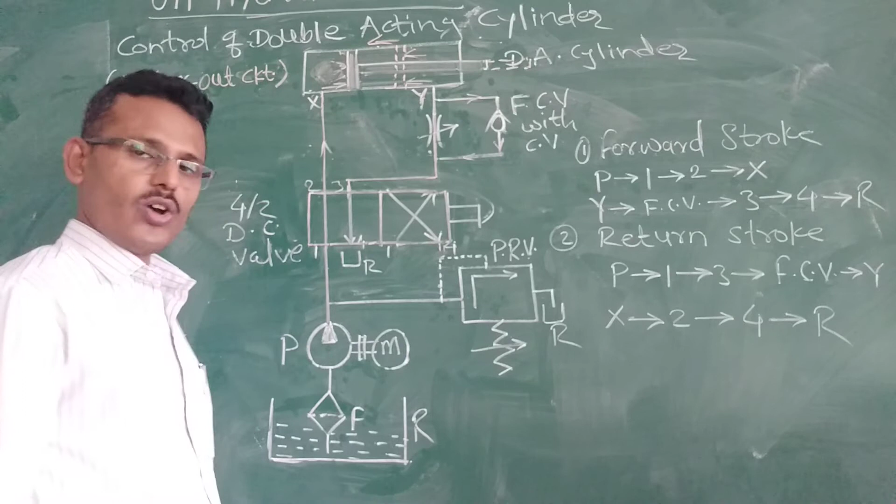So that pressurized oil gets supplied through the pump. It passes from port number 1, that is the inlet port of this direction controller, then it flows from port 1 to 2, then it gets admitted inside the actuator through its inlet port X. When this pressurized oil is admitted inside the cylinder, it will exert pressure on the piston. So this piston moves in the forward direction.

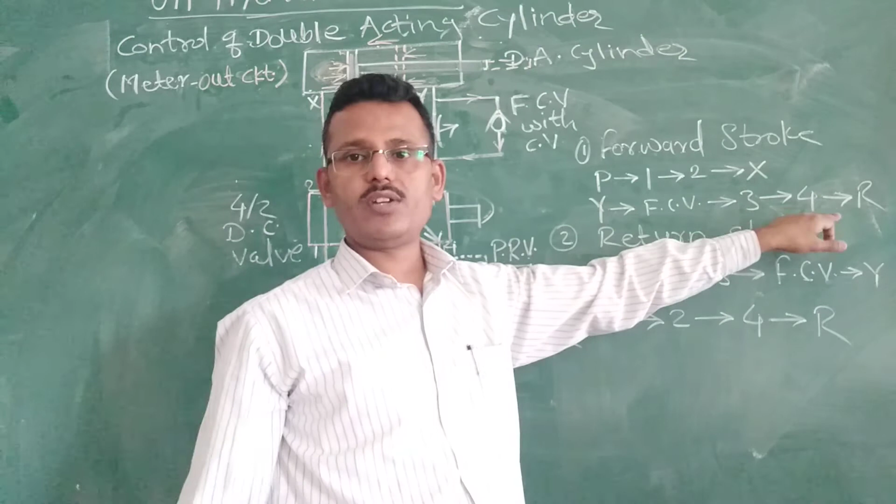So the oil flows from the pump to port number 1, then port number 2, then port X. Then again it flows from port Y, that is the outlet port of this actuator. Then it flows through the flow controller, then port 3, port 4, and finally it goes to the reservoir. In this way it completes its forward stroke.

If we keep the minimum opening of the flow controller, then whatever oil is coming from this side through this flow controller, there is a restriction to that oil. So the forward stroke or forward movement of this actuator will be slower. And if the maximum opening of this flow controller is kept, then a large quantity of oil flows through this flow controller, so that we can obtain faster movement of this actuator in the forward direction.

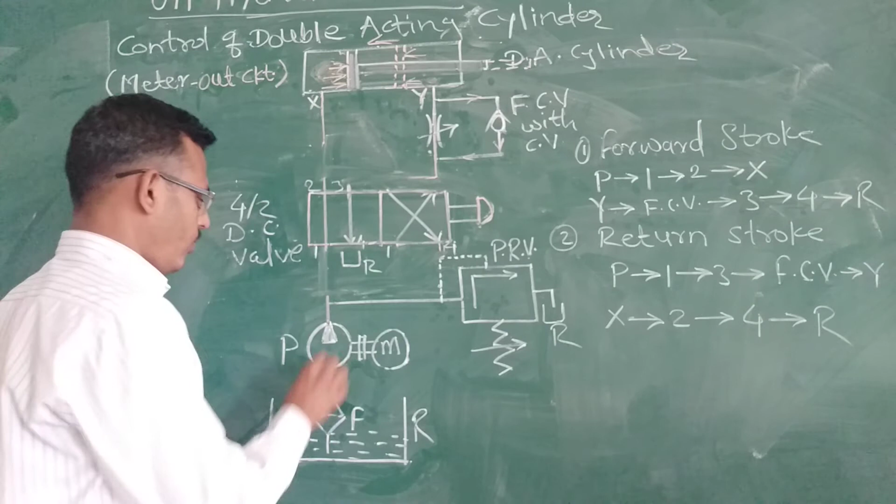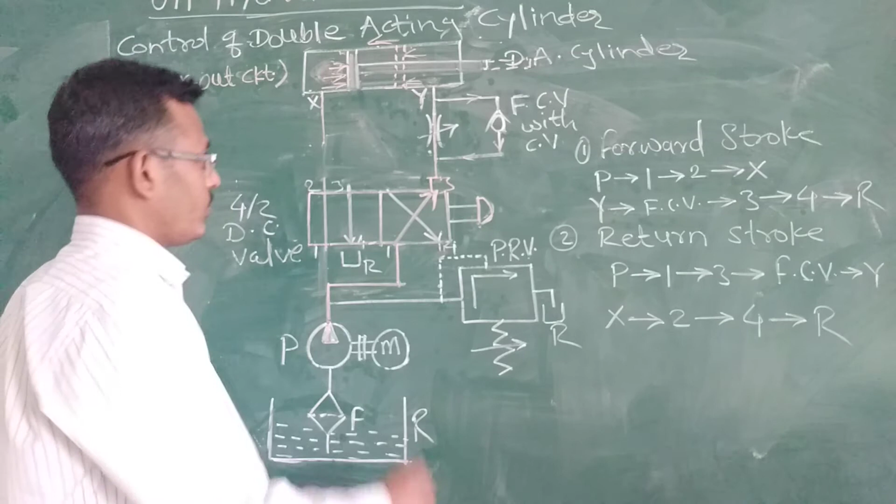Now when I operate or push this push button of this DC, we will get the second position. In the second position, the direction of the flowing fluid gets changed. So the oil flows from this pump to port number 1, then from port 1 to port number 3. From port 3 it flows through the flow controller. It does not flow through this check valve or non-return valve. Then it is admitted inside the actuator through port Y. Then it will exert pressure on the piston, so that this piston along with the piston rod moves in the backward direction.

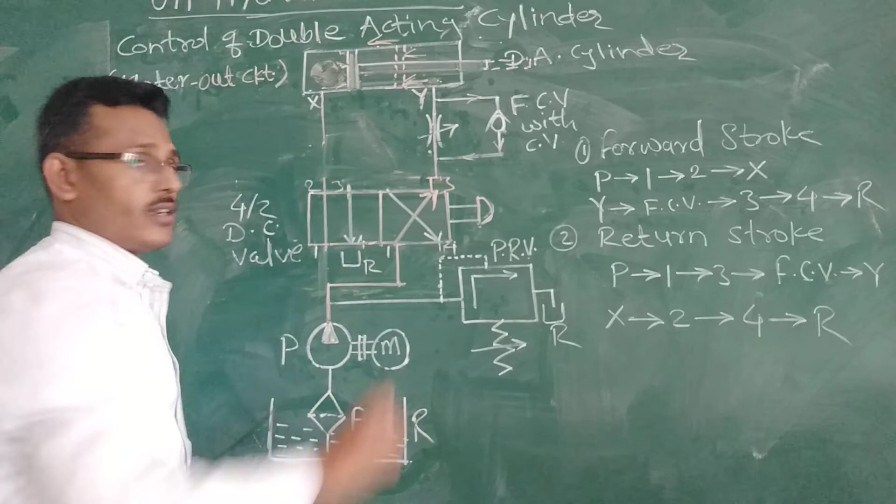If I keep the maximum opening of the flow controller, then a large quantity of oil will start to flow through this flow controller, and it exerts maximum pressure on this piston, so that this piston moves at a faster rate in the backward direction. And if I keep a minimum opening of this flow controller, then a minimum quantity of oil flows through it, and it exerts less pressure on the piston, so that this piston moves in the backward direction with lower speed.

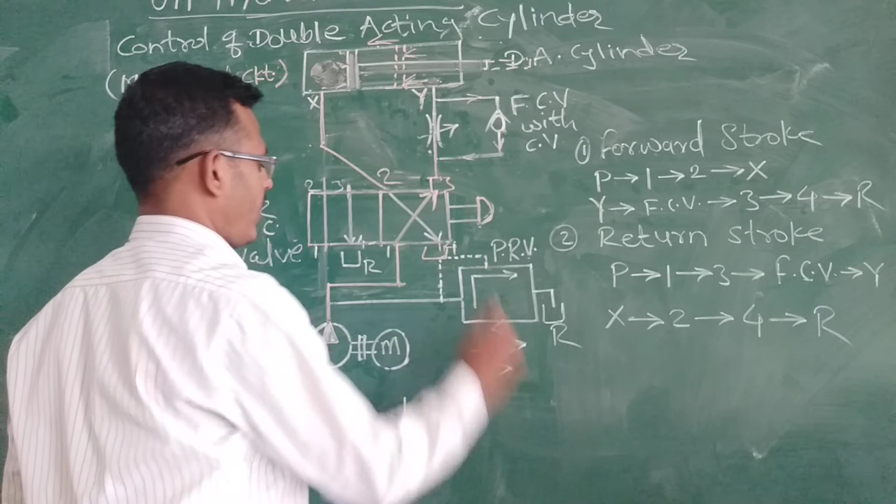Then whatever oil is present in this area, on the piston side end, will flow through port X, then port number 2, then port number 4, and finally it reaches the reservoir. And in this way it completes its return stroke.

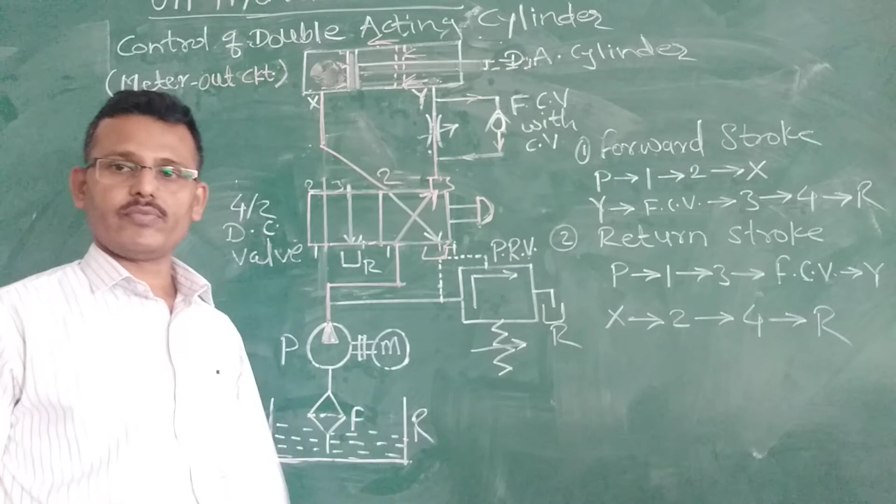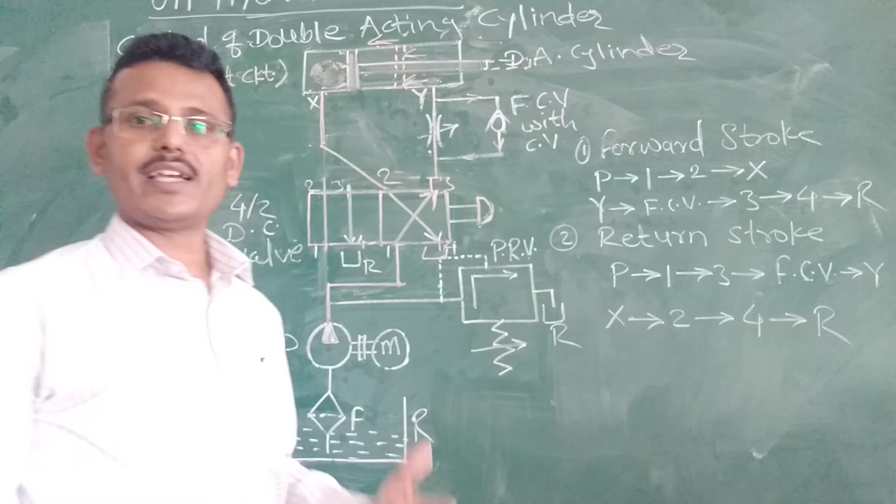So if again I operate this push button, then again the oil flows from the pump to port number 1, then port number 2, then again it is admitted into the actuator through its inlet port X, and again it moves in the forward direction. Again, whatever oil is present in this area goes to the reservoir through port Y, the flow controller, port number 3, port number 4. In this way the cycle gets repeated by operating this push button.

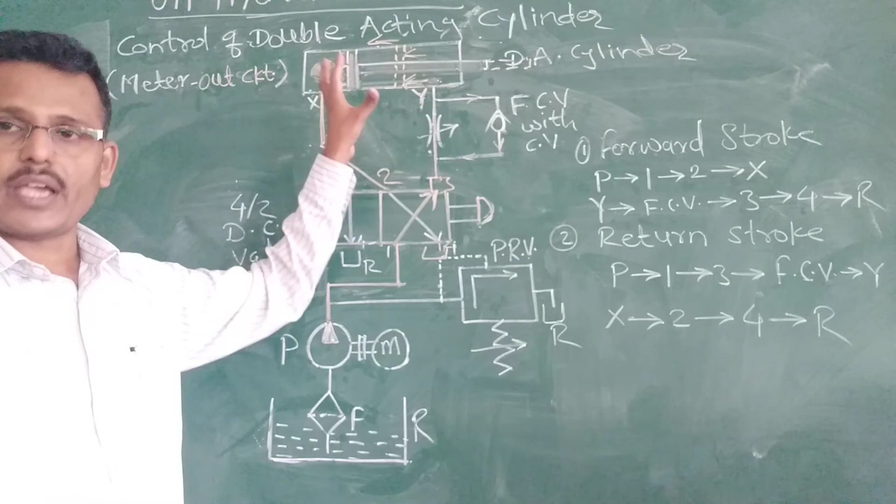So with the help of this variable flow controller, we can obtain different speeds of the actuator. As per our requirement of the speed of the actuator, we can obtain it by using this flow controller. So this is about the meter out circuit.